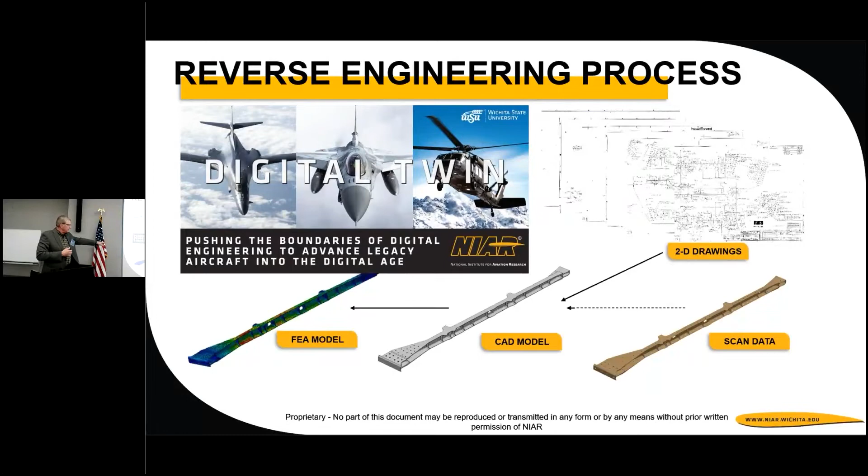And of course, those are fully annotated with all the drawing notes and information associated with it in modern form. From that, you can go ahead and make, let's say, a finite element model, any type of model-based engineering approach, because you're using a validated source of truth. Next chart.

So I talked about all the programs that we're working. I think the Apache's next for us. F-16, we're doing two blocks, 30 and 40, so we'll have those two variants.

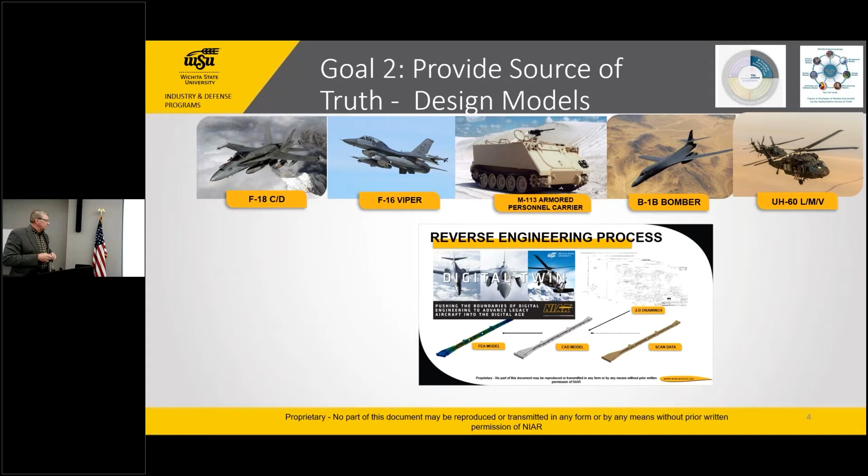So again, once you have that, you can go and have CFD against that original data, or you can have a finite element model for validation. I look at a finite element model as just a bunch of nodes, and I've created a ton of NAS trash in my career as well. But the point is, unless it's validated against something for its configuration, it's really not worth much.

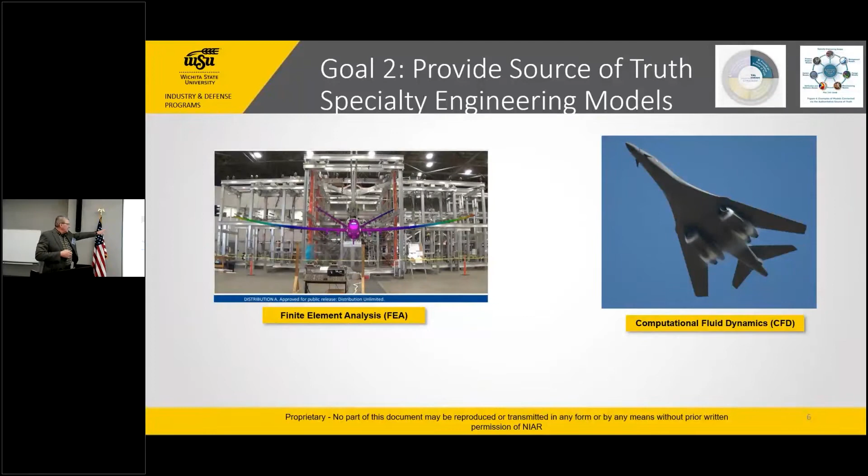So again, we did some reapers. I won't take any more than five minutes on this.

This is the MQ-9 Reaper that's in our rig, where we did static and fatigue testing. From that, we used several thousand strain gauges to help us validate.

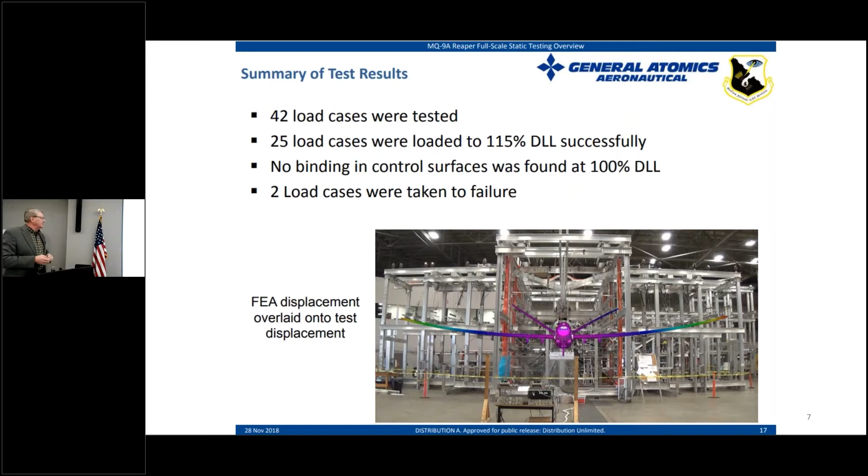Same thing we did on the Blackhawk helicopter. We had a flight asset that we strain gauged, which gives us a way to go validate the finite element model for that as well. So now we have loads that are actually tied back to the source of truth.

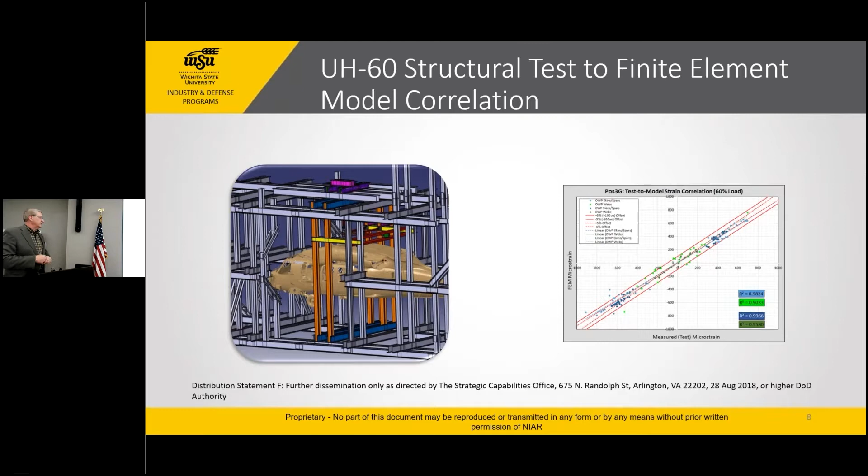So once you get that, the next thing you go around the circle to is innovation. Now I can start looking at modern tools for building, and modern manufacturing. But I can also get into things like digital X-ray, automatic paint removal, robotic repair, and so on. So you think of the digital models, that baseline becomes the enabler that allows me to go implement some of these new, modern digital processes. It's going to really make a difference for us in our sustainment life and outcome.

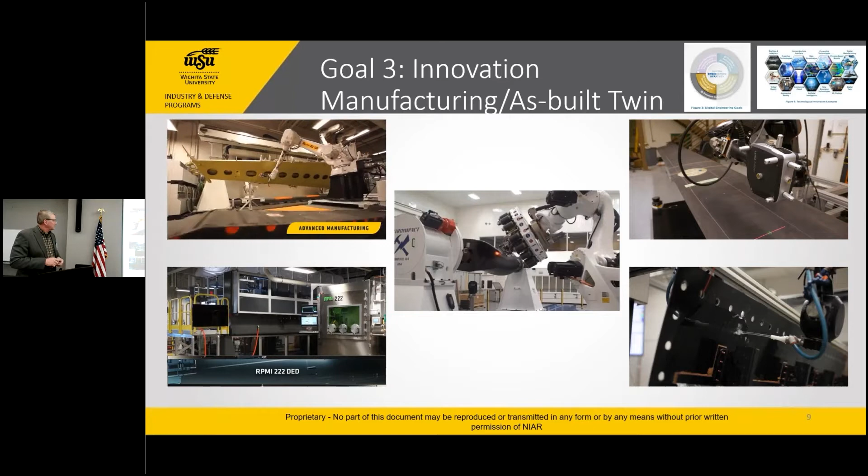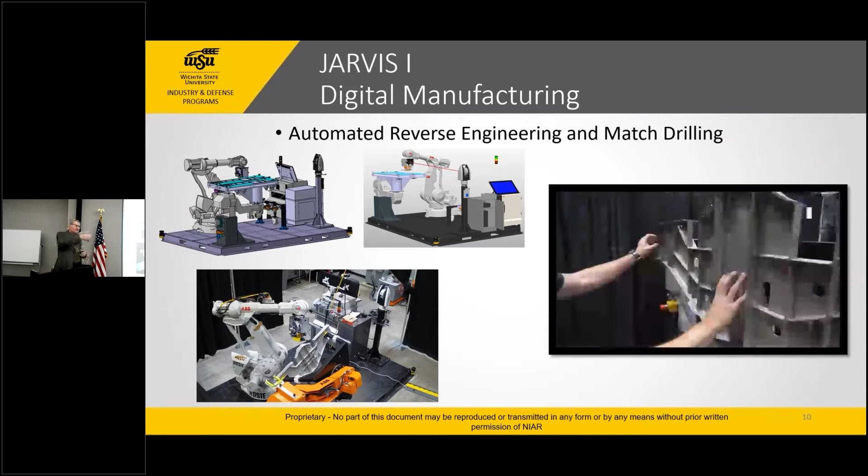Another project we had is what we call Jarvis, which is nothing more than a scanner and a drill head. One thing about sustainment is after you replace a part and take the old part out, it was hand drilled, and none of those holes match exactly where the type design was. So what I do is take the old part out, strip it down, put it in a machine, it scans it and gives us a position vector, then we put the blank part in and go back and make an exact replica of the part.

This is a project we did in taking established technologies and putting them into an application that would drastically affect sustainment. We had a part on an F-18 that sits between the engines, taking 3,500 man hours to replace one of those, and I think we're taking about half of the time out of that just by giving a part that has matched holes.

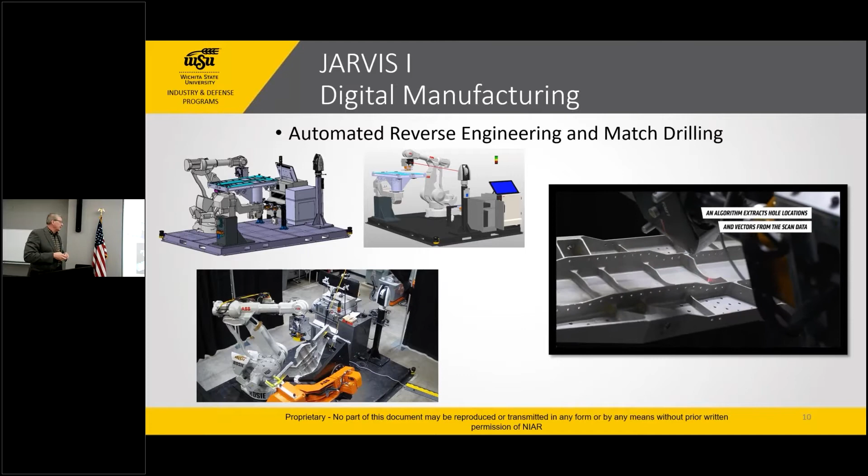Next, this is Jarvis 2, an automatic blade repair cell. What it's doing is taking existing technologies from scanning, shearography, laser shearography, and thermal inspection of the blade itself. We can do automatic paint removal, automatic painting, automatic grinding, and removal of damage and repair. The technician still has to take the patch and bring it back to the machine to put it on, but otherwise it's pretty much an automatic process.

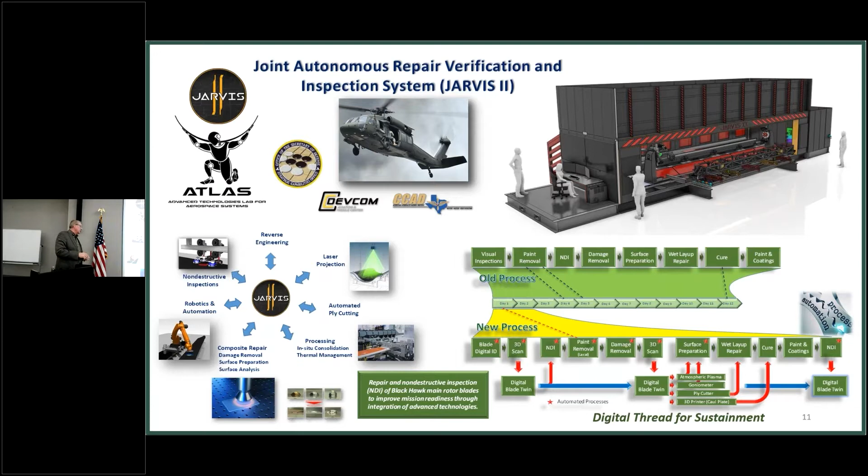Again, it's just a bunch of enablers once you get that digital data.

And then, of course, the other important piece is that once you have the technologies, you have to go develop the infrastructure. You have to make that start working within the systems, getting your work instructions, your CAMs, your LMS. Everybody understands this is really the tough part to do, especially on an old depot, an old system.

Digress a second here because I've been working a lot with the depots. I think I visited every depot and arsenal this last summer helping with modernization plans. A lot of folks think modernization is like a guy with an old truck that has an 8-track player in it, and they want to modernize, so they go looking for a digital 8-track player. I tell them that's not modernization.

But on the same light, if I have a process where I'm inspecting the gear with calipers and a feeler gauge, and I take it over and buy a real fancy Keyence blue laser scanner, but I just use that same data as a go, no-go, I'm still using my digital 8-track player. But if I take that data and pass it on to something like what Jason's going to talk about, his system, where I can actually analyze the wear pattern of that gear and be predictive, and tell you when I have to inspect or replace it, then I can really affect the outcome. So we have to be careful how we implement technology. I'll get off my soapbox, go to the next chart.

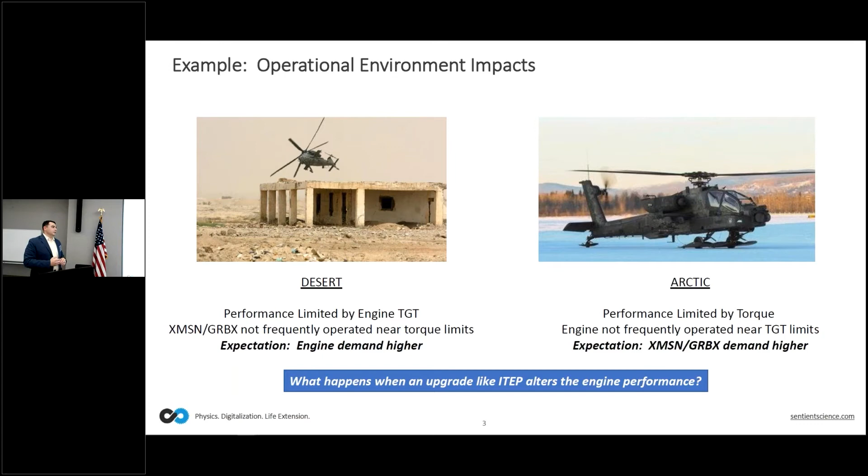So for drive systems, it's invaluable to be able to have some capability to predict the accumulation of damage over time and correlate that to usage.

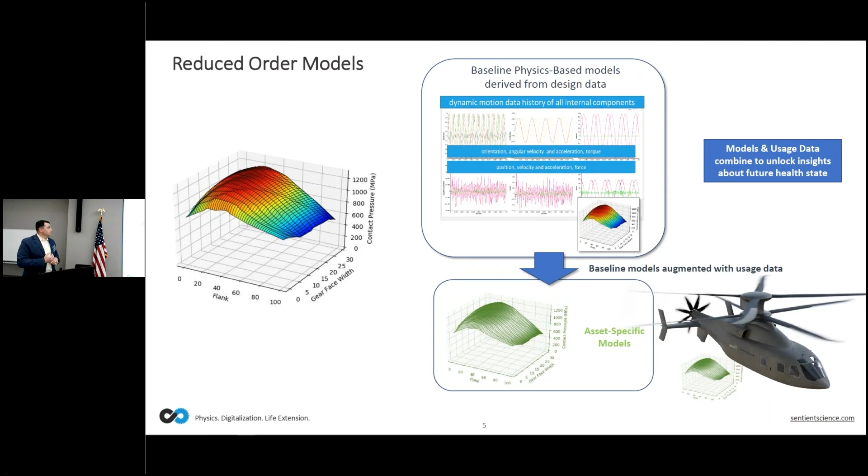So this is kind of our ultimate end state vision on how that works. You've got a series of baseline models, or a set of baseline models, that would be related to or tied to the design of the system. And every aircraft at its entry into service, they all kind of start at the same point. And then over time, as they develop their own unique operational history, usage profiles, maintenance activities, etc., those models start to diverge.

What you've got is a population of users that may fall into a heavy duty user category, where the damage accumulation in those drive system components is accelerated because of the way they fly or the operations they're doing. And then you may have less strenuous flight activities that fall into the light duty users, where those drive system components are accumulating less damage. So at the end of the day, not all flight hours are created equal. And so to be able to have digital enablers that allow you to parse that out, to allow you to tie usage to damage accumulation in a way that's consistent with the design methodology used to design these drive systems, can be really powerful.

So this right here is not a trivial activity, for sure. I'm not telling you that my company is able to do this right now. What I will tell you is that we have developed the core technology in collaboration with DoD that forms the baseline for this. And now we're working with partners to be able to advance towards this ultimate vision. I think that by the time future vertical lift hits the streets, this kind of thing will definitely be achievable. Okay, I know we got limited time, so I'll get off the stage real quick.